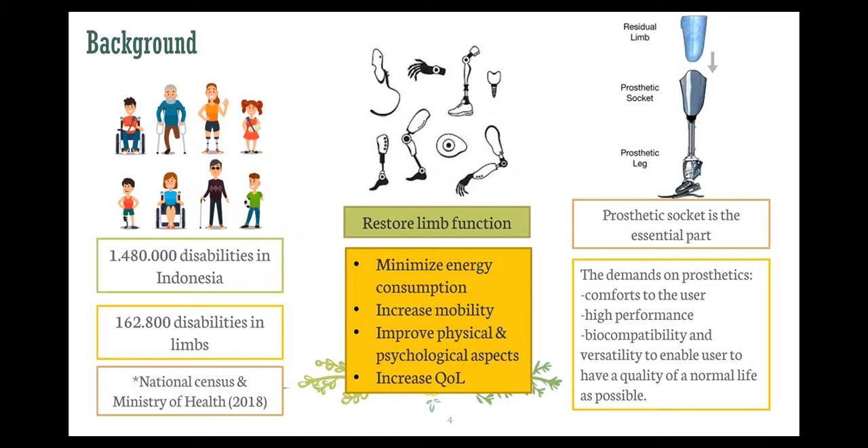The biocompatibility itself is related to the socket's material, and based on that, the prosthetic socket is the most essential part because it's the part that touches directly to the residual limb. And the socket material has also evolved.

Since the beginning it was made from leather, and then it was made from aluminum metals, and most recently it's plastic.

The plastic one has disadvantages, which can cause environmental problems because it can be difficult to recycle, and then users need to change the sockets frequently due to the volume or the breaking of the socket itself.

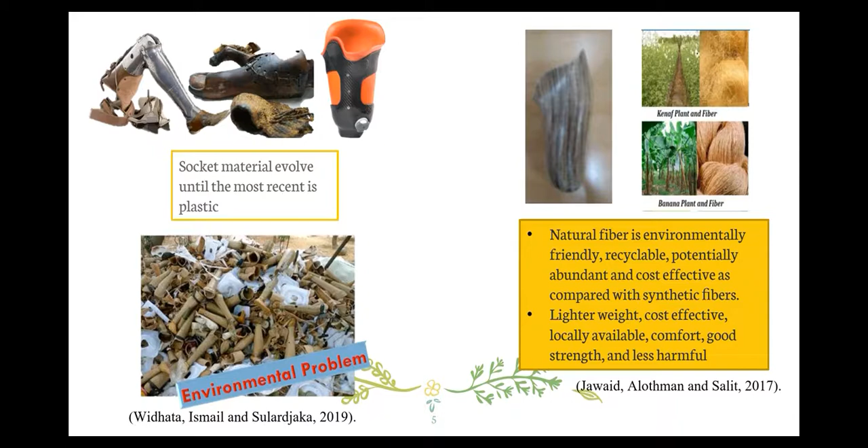To overcome the problem, the solution is to utilize natural fiber as the socket material of the prosthesis. Natural fiber also has advantages, which is environmentally friendly, recyclable, potentially abundant, and cost effective as compared with synthetic fibers. It also has lighter weight, cost effectiveness, local availability, comfort, good strength, and is less harmful to the environment and to the person itself.

War, natural disaster, chronic disease, trauma is a major factor of the prosthetic demands. Nowadays, the chronic disease and trauma is increasing in rate, so it will increase the high demand of the prosthesis.

The socket is anatomically shaped and usually fabricated from laminate material, which is composed of an acrylic resin with glass or carbon fiber reinforcements, and those materials are expensive and not available in every city or country. Based on that, alternative and available material needs to be considered.

The alternative material can be made from natural fiber, which can be kenaf, banana plant, cotton fibers, ramie, bamboo plant and fiber.

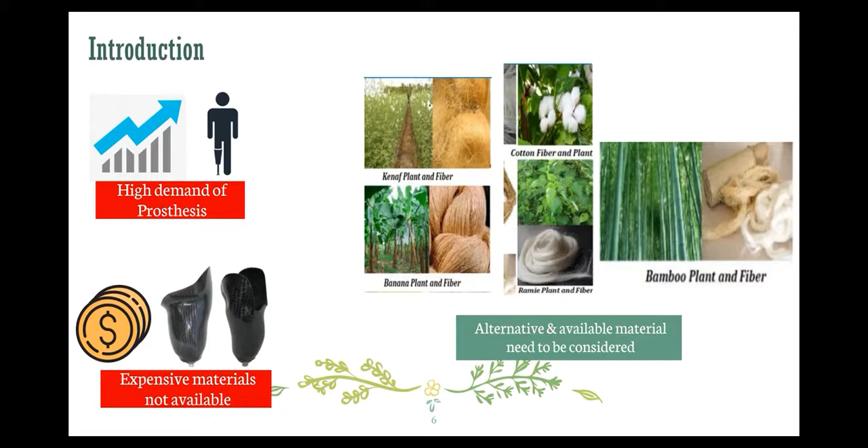The socket is the most critical component of the prosthesis due to its contact with the person's residual limb. The standard manufactured socket uses stockinette, carbon fiber, or nylon glass as reinforcement, and acrylic resin as the matrix. Producing those materials produces irritant emissions of gases and dust, and they have risk of allergies for users because they were made from chemical things and synthetic material.

To overcome that, plant fibers can be chosen because they are durable, recyclable, low cost, have high specific strength, low bulk density with high strength.

So the aim of this journal is to demonstrate that prosthetic limb sockets can be constructed from renewable, low hazard material without compromising the strength of the composite material.

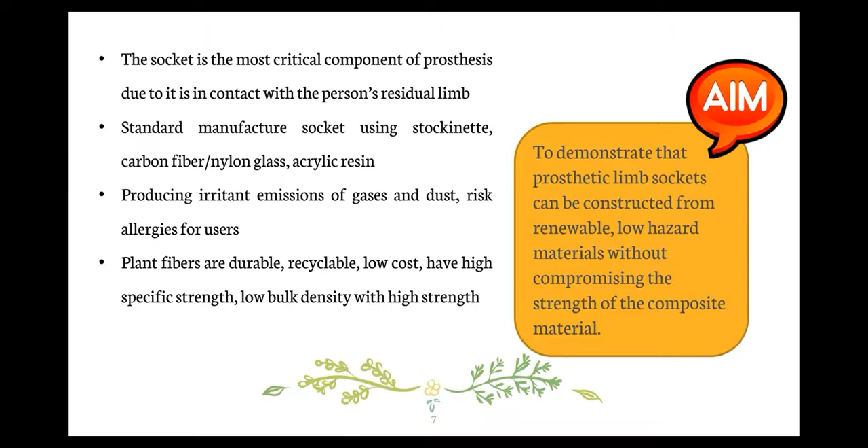For the methods, the authors use plant fibers from bamboo, banana, corn, cotton, flax, ramie, Seacell, and soya. They also use plant oil-based resin and Shore D hardness.

They also use nylon glass stockinette and acrylic resin as a comparison for strength test socket. They use an instrument, the Roland EGX 600 engraving machine, to make the specimen, cutting the specimen into a dumbbell shape like this.

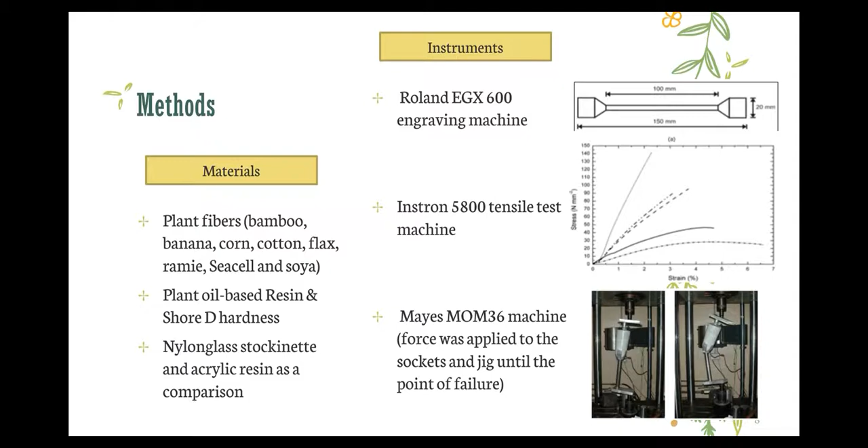They also use the Instron 5800 tensile test machine, and the Mayes MOM36 machine, which applies force to the sockets and jig until the point of failure.

For the procedure, first they conduct the tensile strength test. They laminate the fibers into specimens. Each dumbbell specimen has been tested 5 times with constant volume of fibers.

The specimen were clamped into the Instron 5800 tensile machine, placed in position, and then the machine pulls out the specimen until it breaks, and the software and computer record the result.

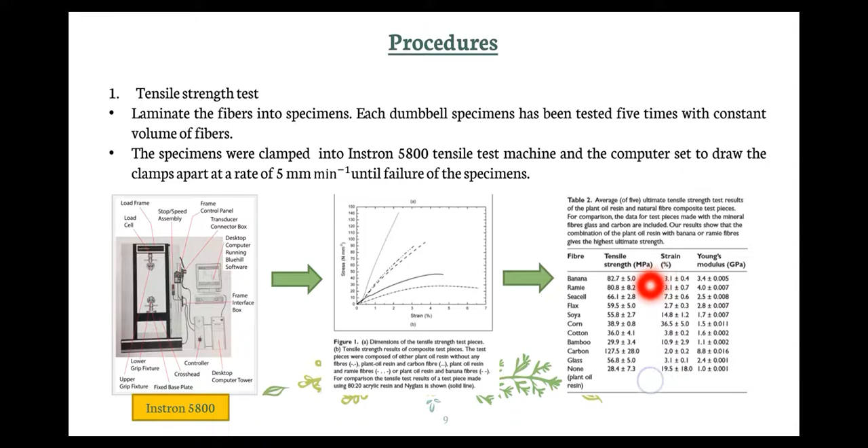So this is the result. It shows that the banana and ramie fibers have the biggest tensile strength result. Because of this, the author chose banana and ramie fiber, since it's the biggest strength amongst the materials, and it turns into the wave stockinette.

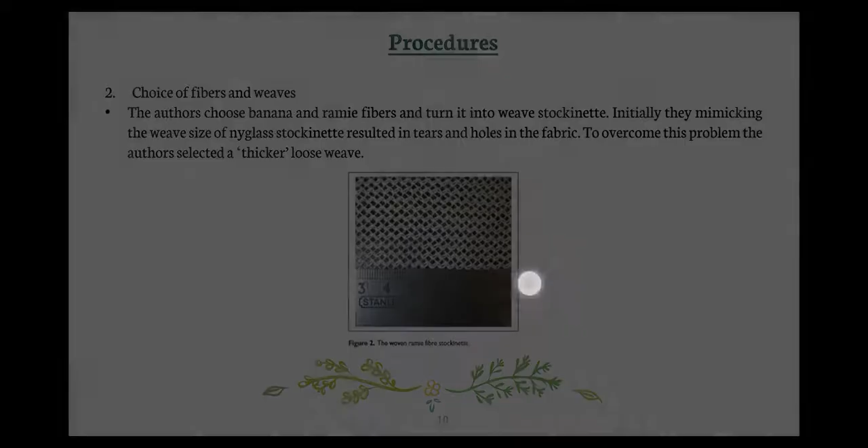Initially, they mimicked the weave size of Nyglass stockinette, but it resulted in tears and holes in the fabric. To overcome this problem, the authors selected a thicker, looser weave. This picture shows it is bigger than the stockinette weave.

The next procedure is conducting the test socket manufacture following ISO 22523 Annex C as a standard socket. This is the dimension of the socket. They conducted the manufacture layup following the previous study as their guideline.

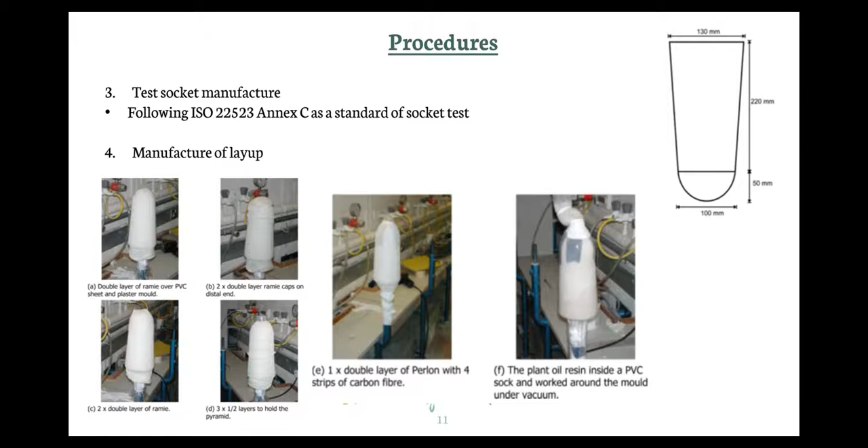They conducted the lamination as a standard procedure, and then added carbon fiber material at the distal end, using plant oil resins. The carbon fiber one was used for comparison with the standard socket. The standard socket also uses carbon fiber as reinforcement to prevent bias. The natural fiber one also uses carbon fiber.

Then the socket strength comparison test was performed. They put the socket into the jig test, and the socket and jig were loaded into Mayes MOM36. The force loading machine held an initial loading at 920 Newton for about 60 seconds, then increased the rate by 100 Newtons per second until it reached the break point.

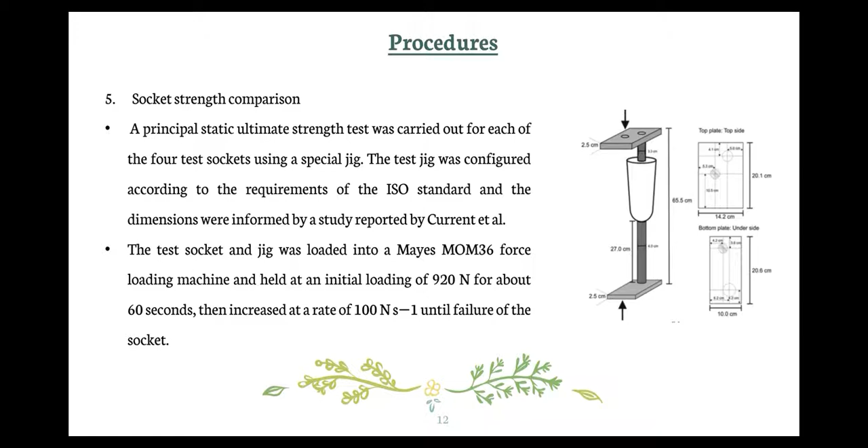For the result, first the tensile strength test: the banana and ramie show the highest tensile strength among the natural fibers, and the tensile strength and Young's modulus are still under the carbon fiber composites but higher than the standard material, which is the nylon glass.

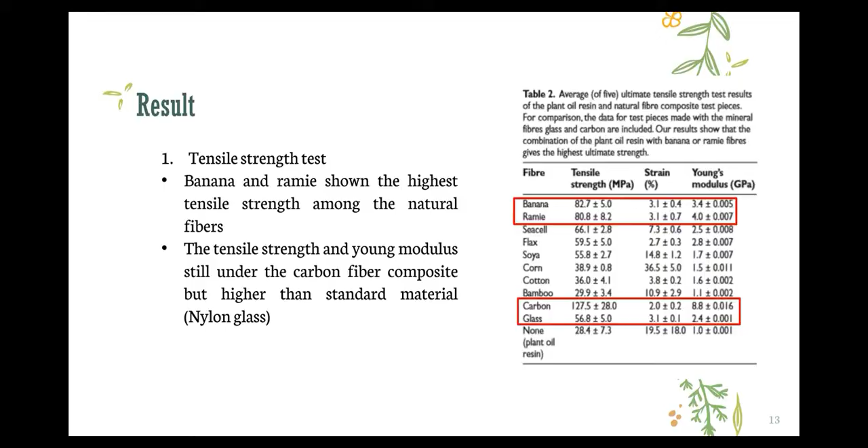Then in the socket testing to destruction, all sockets failed at the pyramidal attachment point. On the distal end, it's the pyramidal attachment - the point where the socket assembles. There was no significant difference between rami plus plant oil resins and the standard layup socket.

Both materials failed at 6 kilo-Newton.

This solid line represents the ramie fiber with plant oil resin, and the dotted line represents the standard layup material. The ramie and plant oil resin had a bigger value at loading at failure, and was thicker than the standard layup socket. The standard layup socket uses the Nyglass stockinette.

Also, for socket 4A, its failure was because of a small amount of water at the distal end. To overcome this, they tried again with socket 4B, but dried the stockinette and ramie fiber overnight in an oven at 50 degrees Celsius.

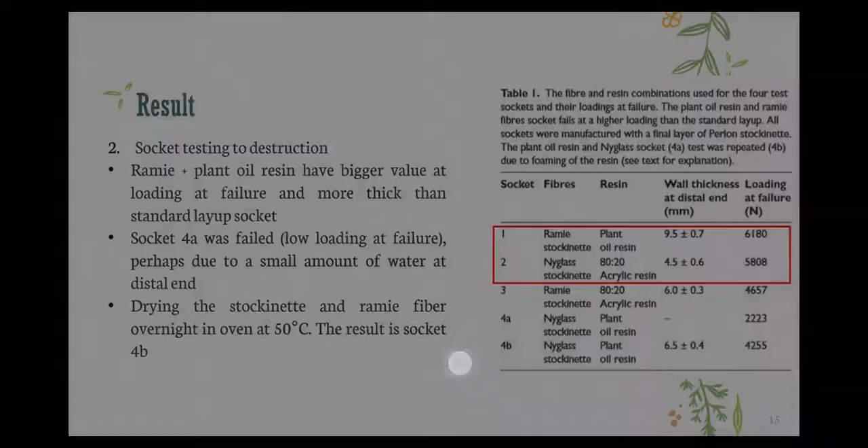For the discussion, the ramie and banana fiber showed the best performance with the plant oil resin in the tensile strength test. A previous study conducted by Kim and Netravali found a similar ultimate strength for ramie fibers attached in soy flour resins. Increasing the protein content of soy flour resins also increases Young's modulus and tensile strength.

They also conducted tests with fibers and without fibers, and the authors saw a similar increase in composite strength if they increased the fiber concentration.

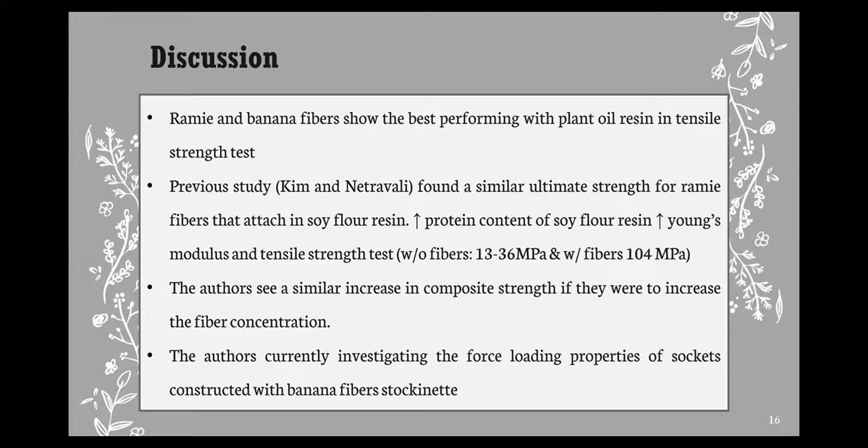The authors are currently investigating the force loading properties of sockets constructed with banana fiber stockinette. This study only tested the ramie fiber; the other ongoing study by the authors is working with the banana fiber stockinette.

The ISO 10328 standard requires that a socket be able to withstand a loading of 4 kilo-Newton. Sockets 1, 2, 3, and 4B exceeded this value.

Socket weight is also an important consideration in socket design. For a given socket size and wall thickness, a socket made with the conventional material would be about 23% heavier.

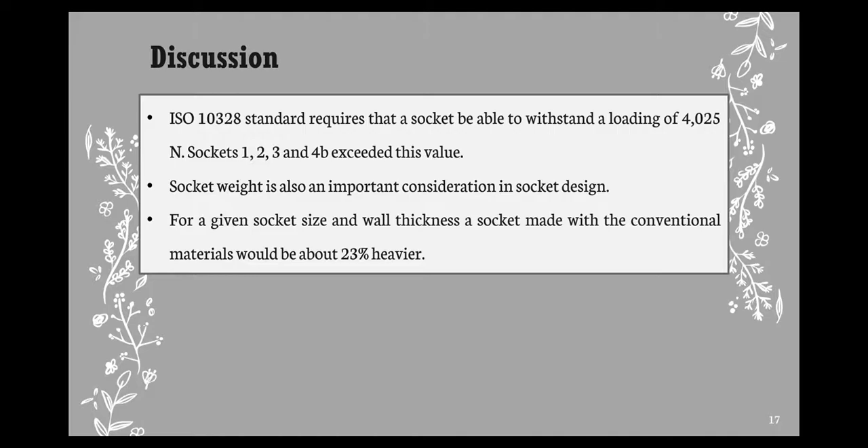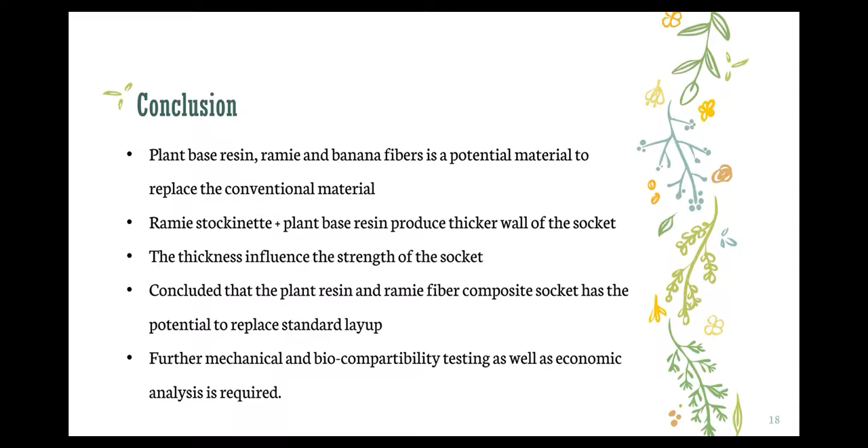For the conclusion, plant-based resins, ramie, and banana fiber are potential materials to replace conventional materials like acrylic resins and synthetic fibers. Ramie stockinette and plant-based resins produce a thicker wall of the socket, and thickness also influences the strength of the socket. It is concluded that plant resins and ramie fiber composites have the potential to replace the standard layup in manufacturing the socket. Further mechanical and biocompatibility testing, as well as economic analysis, is required to support this study.